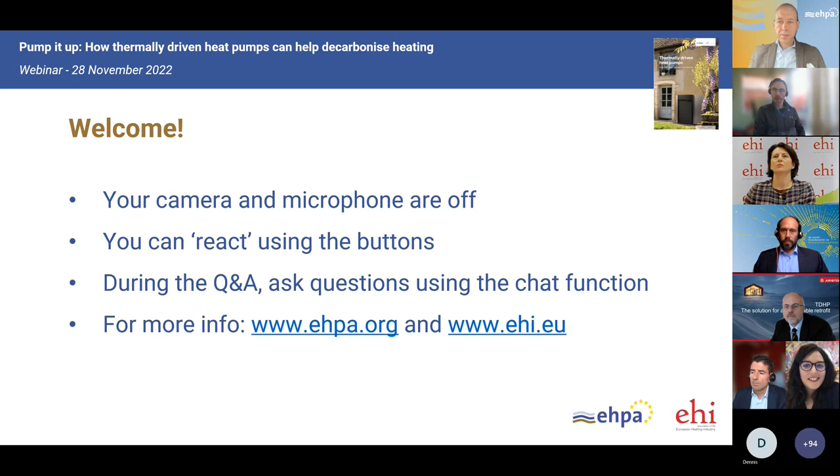Moving on to the agenda: we will start with a short introduction by both Secretary Generals of our associations, then move on to a short presentation of the technology report on thermally driven heat pumps, and finally a panel discussion focusing on the role of thermally driven heat pumps in the decarbonization of heating.

Now you have the main information for this webinar, and I see more people still connecting. Let's start with the introduction by both Secretary Generals. Maybe we should start with Federica Sabbati, the Secretary General of the European Heating Industry Association, EHI. Federica, the floor is yours.

Thank you, Melanie, and good afternoon everybody. Thanks for hosting this event with us for EHPA, and thanks to all of you for attending. I'll just say a couple of words of welcome. A lot has already been said about the structure, but what I still want to bring to the table as a framework for this discussion is that decarbonizing buildings remains one of the most difficult sectors to decarbonize.

This is because buildings vary greatly in size, insulation levels, climate, location, the energy infrastructure where they are located, and the economic availability of their owners or inhabitants. So it's still a very difficult sector to decarbonize, even though in recent years it has gotten much more attention from policymakers to see this challenge and transform it into an opportunity.

And I will quickly run through some slides. What are thermally driven heat pumps? Sarah, you want to hand me over the presenter's rights? Then I can flip myself. Yes, you just need to click on take control at the top of the screen. Yeah, but otherwise I got it, I can do it. Yeah, I got it there. There we go. All right, so let's start.

Before going to the technology, just some considerations. What are we facing in the future, what is the current situation, and what is the challenge in heating houses, heating homes in Europe?

This shows the example of Italy, and the average energy consumption for heating of residential homes per square meter and year. What you see here, the average is still about 180. Italy, in this case, is a little bit lower. Sure, there is not too much heating need in some parts of Italy, but some parts are still heavily depending, especially on gas heating.

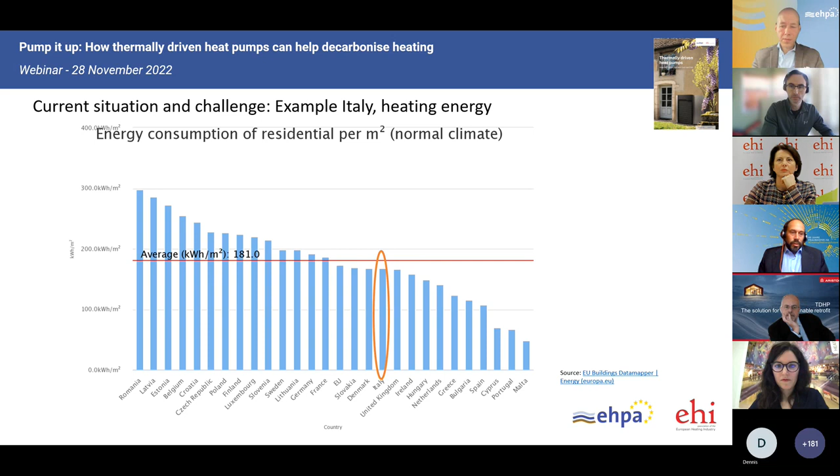And as you can see on the next slide, also the existing buildings situation is usually, and this counts for many European countries, such that many existing houses are not too much renovated, not too much retrofitted, and have still quite a high energy need for heating. In Italy, it's more than 50% of the buildings that are in category F and G, which are the worst categories for energetic efficiency of buildings. This is a big challenge that we need to quickly face within Europe to really reduce CO2 emissions quickly.

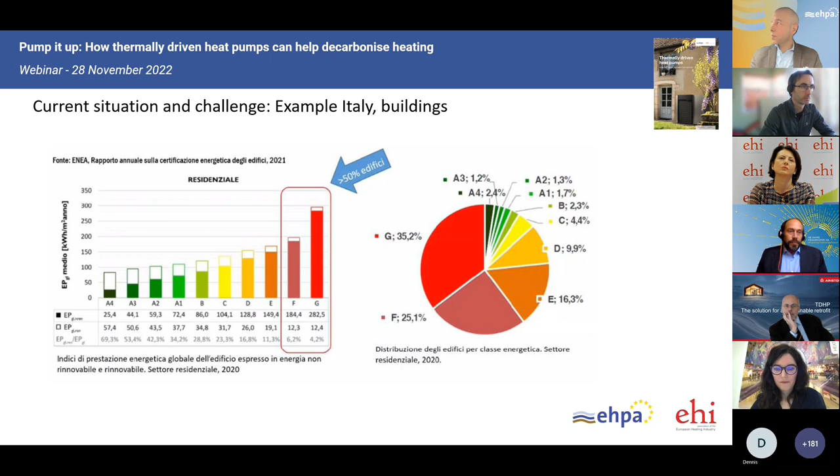Another thing that comes with it is what I already said: currently a lot of energy provision is still done by natural gas. You can see in a year in Italy, in '21, it was very obvious that in wintertime you need a lot more energy, specifically gas, in final use, and even more if you take the upper blue line. You also see that quite a share of the electricity that goes into buildings is currently still produced by burning gas, while the energy demand for electricity is currently much lower. This is basically the same picture for many European countries, for Germany, for the Netherlands, it looks pretty much the same.

And the big question is, how can we change the heating of our homes, and how can we reduce the energy consumption for doing so?

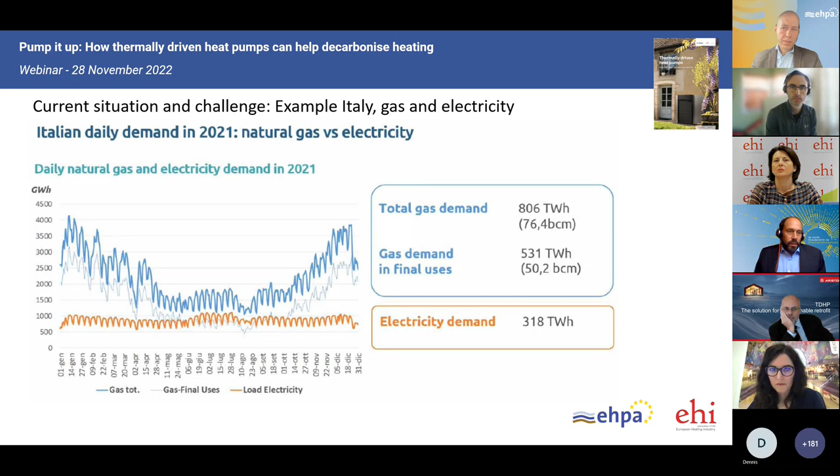One option we want to look into in more detail here is thermally driven heat pumps. Let me give a quick, rough explanation of what this means.

Typically, when talking about heat pumps, people mean vapor compression heat pumps. They take mechanical work, delivered by electricity driving a compressor, and take a lot of renewable heat from the ambient. They deliver it for heating of homes and domestic hot water production at a medium temperature level, which can also be higher, but they usually perform best when temperature levels stay low.

The same is true for thermally driven heat pumps—they also perform best when temperature levels stay low. But what they do is use a thermal compressor, basically. What this is in more detail we can discuss later. It takes a gas burner, for example, but it can also use other thermal energy to run this thermal compression cycle. It also takes ambient energy—ground source heat, air, or other ambient heat—and delivers heating. The temperature levels that can be delivered with still a decent heat pumping effect are a little higher than for standard residential compression heat pumps, and they don't drop as quickly in efficiency.

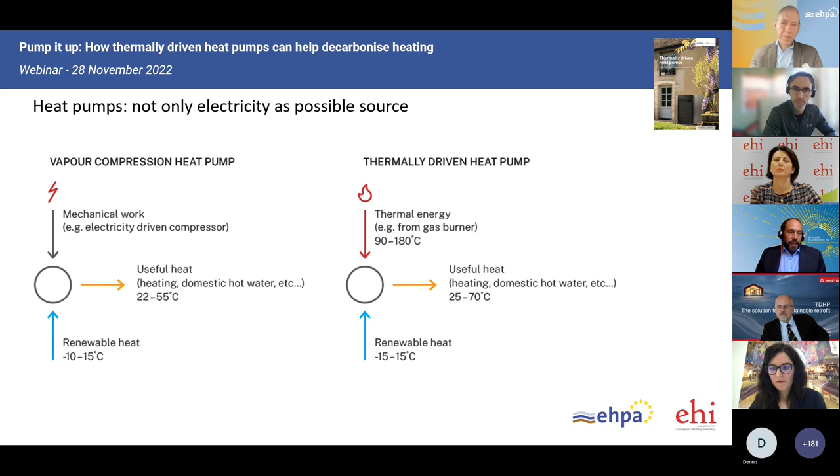Starting from this understanding of the technology, let's take another view on how we heat our homes.

We have the typical wall-hung boilers, the gas condensing boilers. They currently usually run on natural gas. The boiler has some losses, and then basically delivers maybe 90 to 95% of this in the form of heat to the building.

A vapor compression heat pump takes electricity from the grid, which can be renewable and will increasingly be so in future, but currently is also produced by coal or gas plants—just the typical mix in the grid. In this example we use a primary energy factor of 2.5, which is an average. It's now being discussed to be lowered across the EU, and it differs a lot, maybe between 1.5 currently and up to 3.5, depending on country, season, and location.

This primary energy is taken, electricity is produced, and from this electricity you can run the heat pump. Here a COP of the heat pump of 3.1 is assumed, and you get, in this calculation, 125% of the heat you put in on the primary side. These figures are examples—they can change depending on the boundary conditions.

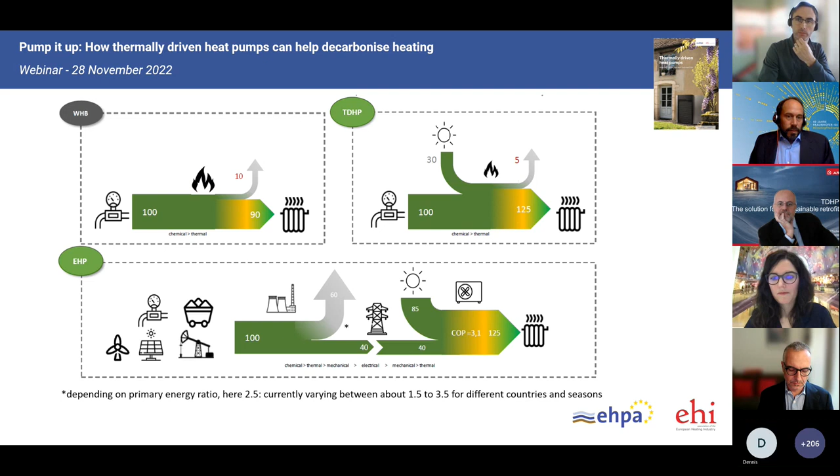Absorption implies that it is a liquid sorption process. The liquid solution is continually circulated, desorbed, and absorbed. The refrigerant is usually ammonia in this case, with a low global warming potential.

Usually they use a directly fired generator to run the heat pump process, and it's probably the most commercially mature TDHP option.

There is another typical option, also a sorption heat pump: the adsorption process. It's a batch process with solid sorbents, and again, for example, the refrigerant ammonia is used there. There have been past examples using water as the refrigerant, but they had issues, especially with low temperature heat—ambient air—which needs to be used even at temperatures below zero.

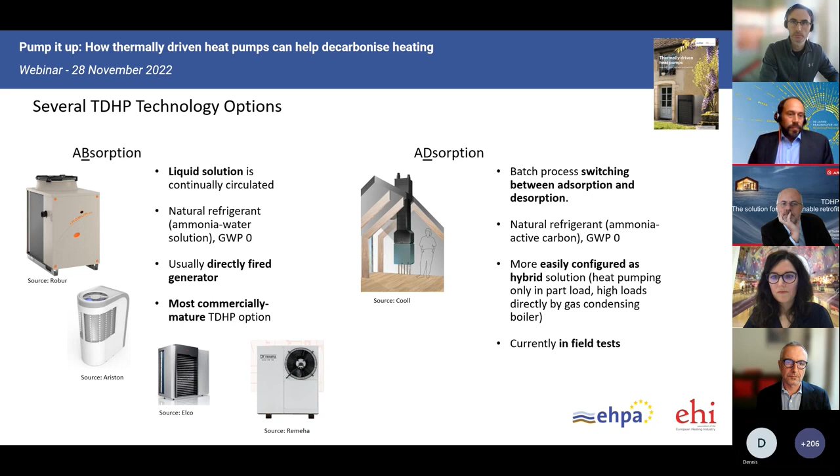There are other technologies for thermally driven heat pumps which I won't go into in detail now, both due to time restrictions and because they play less of a role for residential heating. This includes gas engine heat pumps, which basically use a gas engine to run a vapor compression cycle. It's also a thermally driven heat pump, but usually more used in industrial applications or for cooling, which we won't dive into at this point.

What are the challenges for this technology? They're basically similar to those for electrical heat pumps—for example, needing space for an outdoor unit, either for the full heat pump or to get ambient air. There might also be regulations around the use of refrigerants like ammonia, and especially some specific regulations there.

It is definitely the case that these options, since they have, in addition to any type of combustion system, a heat pump system, the form factor or footprint is larger than competing options, and the fully installed costs are usually higher than for a gas condensing boiler, at least.

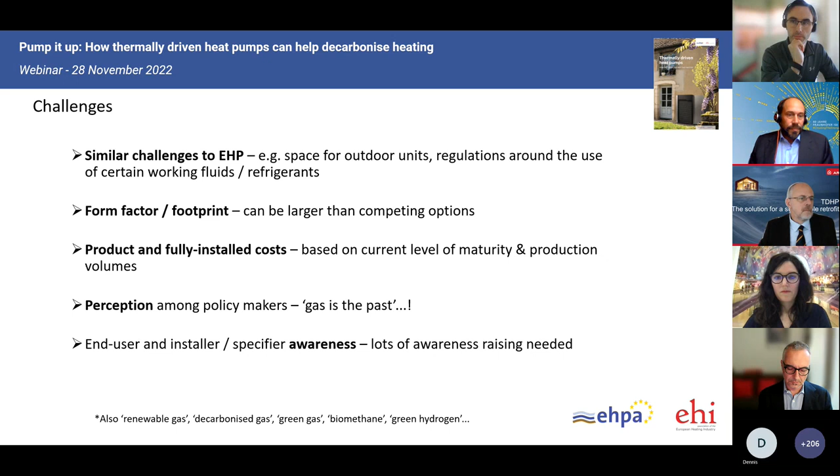It is key that these technologies provide a certain flexibility, and that they can tackle the big issue of retrofitting existing buildings and reducing primary energy consumption of existing buildings. That's, let's say, a little personal view.

We would say that they quite intimately link efficient technologies of a condensing boiler and a heat pump cycle, which is the big difference to a typical hybrid heat pump, which has one gas condensing boiler and a compression heat pump next to it. It is really one appliance that basically in all operation points does a certain heat pumping.

They are suitable for high temperature heating systems, quite abundant and needing to be tackled within many European countries—typical radiator heating systems needing supply temperatures of 55, 60, or even more degrees Celsius at low ambient temperatures.

They do reduce the use of fuel by, for example, 30 to 40% compared to a condensing boiler, and they do this by adding renewable energy through heat pumping.

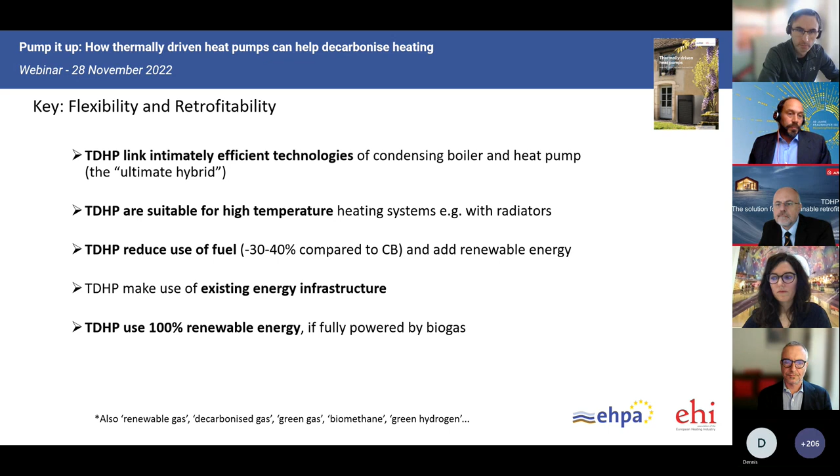So with this introduction on the technology, I would like to give the word to Stephen Ashurst, and I would like to ask the panelists to discuss a little bit. I think, Stephen, you have prepared some questions, so I give the word to you.

Thanks, that's great. Thanks, Gerrit. And thank you to the EHI and the EHPA for inviting me to be involved. My name is Stephen Ashurst, and I'm the Head of Heat Research at LCP Delta, formerly Delta EE. I'll be moderating our panel session, which will last for about the next 40 minutes, in which we'll hear a range of perspectives—from some really excellent contributors at the policy level, at the European level, to some more specific countries where there's really interesting activity, or potentially activity, with regards to rollout of thermally driven heat pumps, or TDHPs, as I'll most likely refer to them throughout.

There'll be time for Q&A and potentially a poll or two at the end of the session as well. Can I just remind all of our panelists that we're looking to keep to about 3 minutes per key point, so I will come in and nudge you along if that's required.

But without further ado, I'd like to begin by bringing in our first panelist, Eric Lecomte from the European Commission. Specifically, Eric, you are a policy officer within DG Energy, ENER B5 at the European Commission, if I'm correct. You've actually just led a report looking at the competitive situation for all heat pump technologies across Europe, which did include thermally driven heat pumps, obviously, TDHPs.

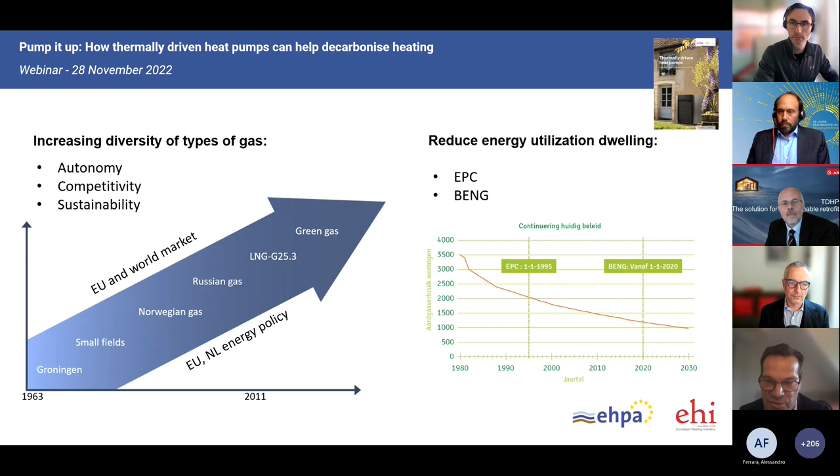So this is our starting point: we have a lot of gas in the Netherlands, we're fully dependent on gas, and we're making a shift towards more green gases and also stopping with gas, to be clear. Let's see on the next slide.

Oh, I can take the control. Hold on. Yeah, so let's see what is happening on the next slide, how we are developing the policy in the Netherlands.

In 2016 we made a new agenda about energy and how we want to treat energy in the Netherlands. We look at several things: our industry, our dwellings, how we produce energy, and we make a program for this.

And the policy of the Netherlands is always aimed at reducing CO2. So there's no selection for the way we want to make the solutions, only aiming at reducing CO2. That's always the ground of our policy.

But in the end, when we had an earthquake in Groningen, the policy changed more quickly. So we wanted to stop with gas production. We changed the legislation in 2018, which means we cannot connect gas anymore in newly built houses. So that gas connection was lost.

So all new built houses are now connected to district heating or mainly electrically driven heat pumps. And it is easy to do because the buildings and the infrastructure are connected and prepared for this new build. So I see it as a good solution to stop with gas if we don't want to use gas, to be clear.

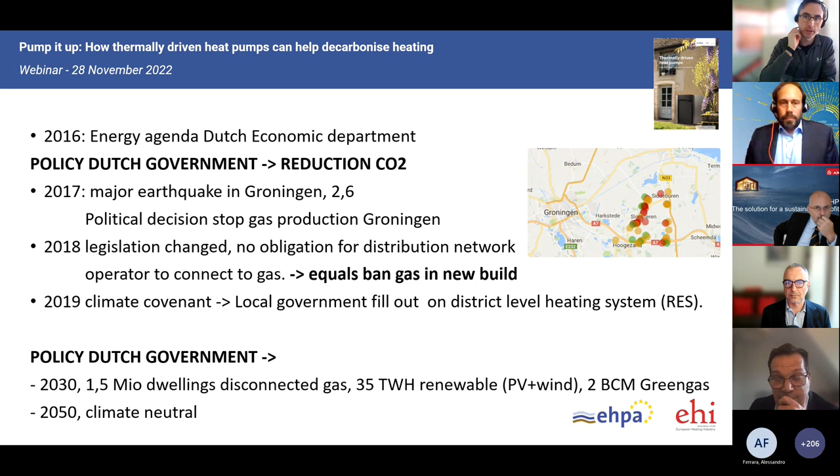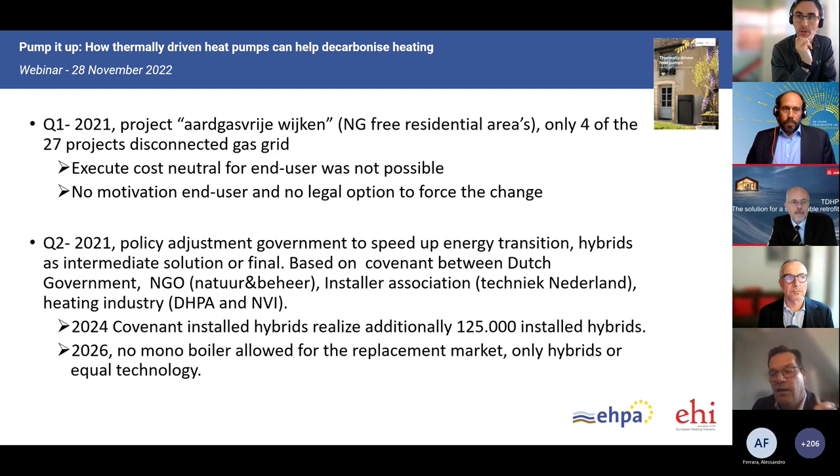Okay, thank you. Maybe to make it clear, we started working on programs to disconnect buildings from the gas grid. What we found was it was hard to disconnect from the grid. We ran into problems like costs being too high for customers, but we also saw there was not always sufficient support for this. So our government changed their approach, and they said we want to do it better, and they added hybrid heating systems to the parameters. So this means for the future, if we're looking at efficient heating installations to meet the targets, we want to introduce district heating, all electric, but also hybrid heating systems.

And why hybrid heating systems? Because they are in balance with our energy structure. So we make the selection: can we go all electric if the dwelling is suitable for this, or when we need more thermal heat, do we select hybrid heating systems? And hybrid heating systems can be thermal driven heat pumps, but also a hybrid heating system like a heat pump together with a gas condensing boiler.

And I think one of the conclusions and one of the points we are at now is that we want to stop with the mono boiler in 2026, and that we want to offer these efficient solutions to the Netherlands market. So we want to roll out hybrid heating solutions. So my conclusion, is there a future for hybrids or thermal driven heat pumps? Yes, there is, because they can utilize the amount of green gas which we will produce in the future, and it will be a good solution to speed up the energy transition in the Netherlands.

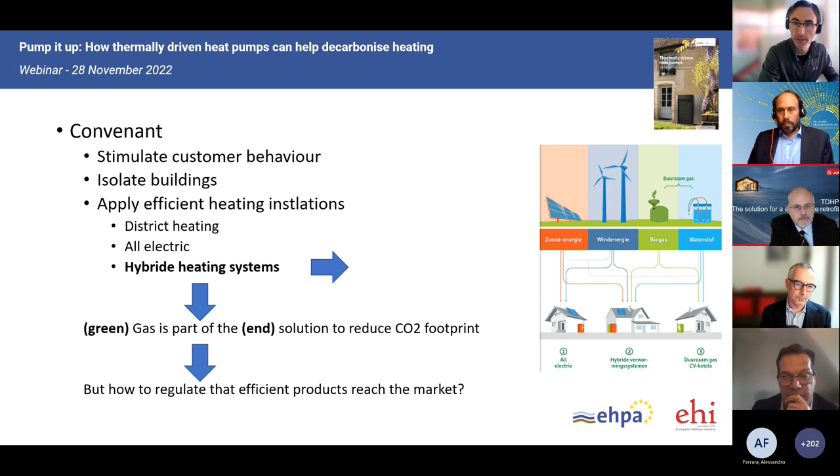But our last but no means least speaker is Luigi Tischer from Ariston. Luigi is R&D Senior Director at Ariston, and Luigi, my first question for you is you've spent a lot of years developing Ariston's product, which we saw in earlier slides. What's your elevator pitch for the product? Why do you feel there's a role for it in the future of heating?

Okay, thank you for the question. I believe there are several different reasons why thermal driven heat pumps should be successful in their introduction to the European market in particular. Let me say, most of these apply to the entire category of thermal driven heat pumps. I would try to consider the benefit for the different elements of the value chain, or the different stakeholders.

In particular, end users will be running an appliance or system which will allow them to reduce gas consumption by 30 to 40%. This is real money saving, not only energy saving. And this in many countries has an important meaning, in particular when we consider that energy prices are expected, as a minimum, not to decrease, but very likely to increase compared to pre-Ukrainian times.

Second, the ease of installation. We mentioned the ability of not redoing the emission system, which is not negligible. Being able to reduce the consumption of a building using and adopting the same radiators is a quite important asset. And let me say, it's not often said, but it's not only a matter of temperature.

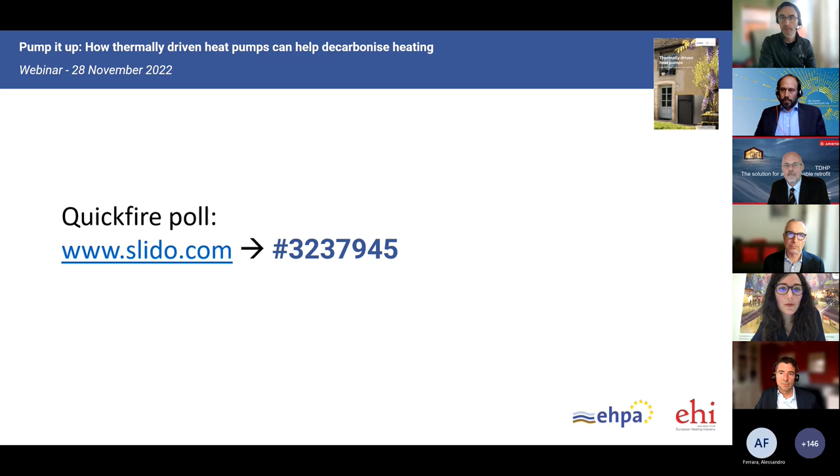I think it was a really informative discussion, hopefully, and we touched on the family of heat pump technologies. Let's work back through our speakers. Coming to you first, Eric, is there any succinct final point you'd like to make, and then we'll come to you, Andreas.

Hello? You're on mute. Oh, I think you're still on mute, Eric. Sorry, no specific point to be made now. No problem. Andreas, anything from yourself? No, that's okay. Okay, happy with your input.

Gideon, from the Dutch perspective or the technological perspective? No special remarks, but I see that everybody's struggling a little bit with the same problems of balancing energy in the grid and trying to make the green path which is in front of us. So it's interesting to discuss today.

Okay, thank you. Mario, if you're still with us, Mario? Yeah, I'm actually fine with what we have been saying by now. I heard what Luigi was saying about the European industry, and I think there is something that as Europeans we should deepen in a discussion, which is probably not the case of discussing it further here, about the ownership that we could have in a future heating market, which is deeply electrified.